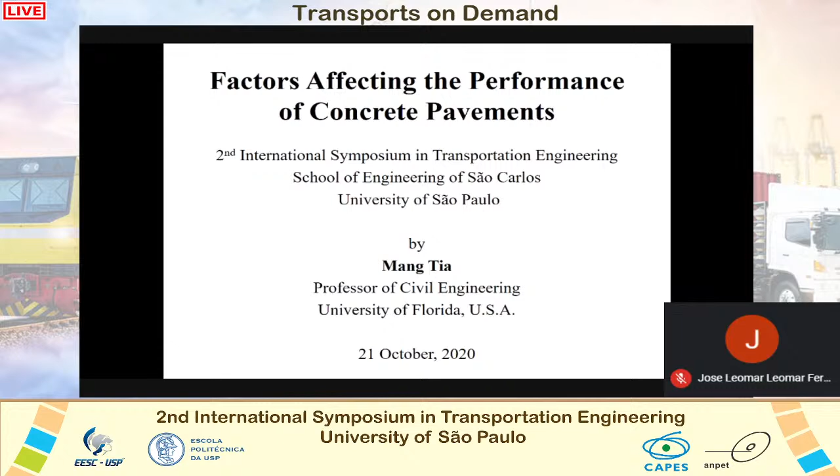Yes, thank you very much, Professor Leomar Fernandez, and thank you for inviting me to speak at this prestigious School of Engineering of São Carlos of the University of Sao Paulo. It is indeed a great honor for me to do that. I have not visited your school, but I hope that in the near future I will have a chance to visit your great School of São Carlos in person.

I am speaking from the University of Florida, USA. This map shows the location of Florida in the United States. The University of Florida is located in Gainesville, marked with a green star on this map. You can also see the location of some famous cities in Florida, including Orlando, where you go to visit Disney World, Tampa, Miami, Jacksonville, and our state capital, Tallahassee.

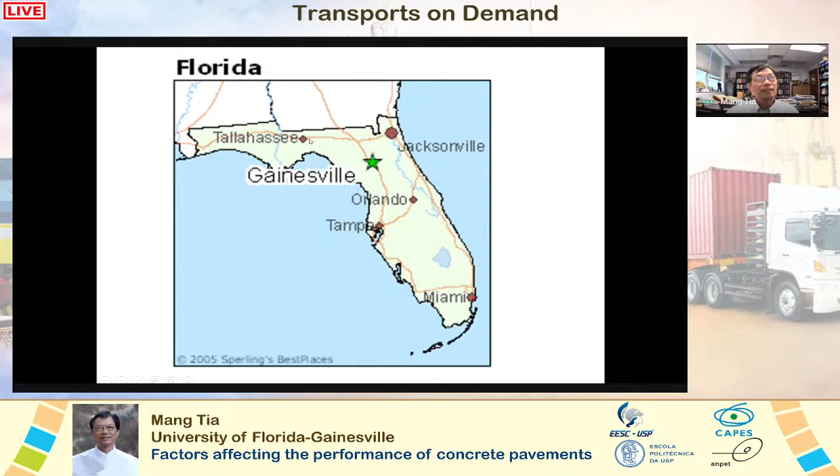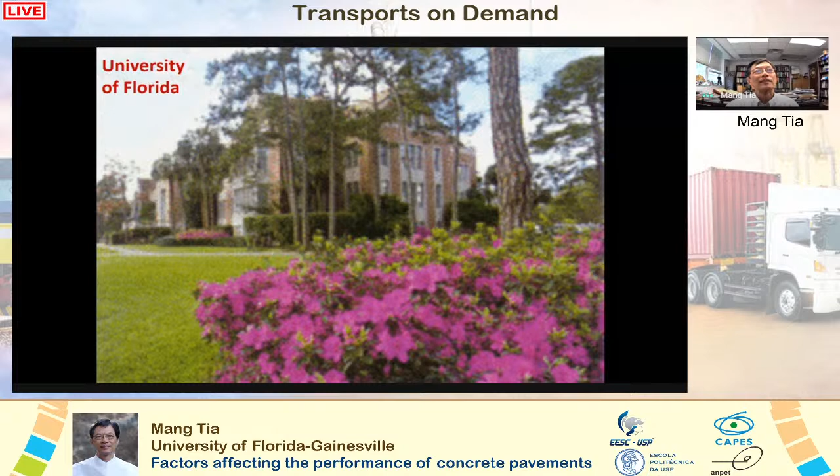However, the highest paid person at our university is not our university president - it's our football coach. People are very crazy about football here. This is the University of Florida during a football game before the pandemic. Now, due to the pandemic, the football stadium is allowed only 20% of its normal capacity, and this is how the stadium looked during a recent football game. If you look at the other side of the stadium, it looks like there's a lot of people, but it's actually filled with fake people - images of people to make it look more full.

Well, recently about 20 people from the UF football team, including the coach, tested positive for COVID-19, and the football game was canceled last weekend. It has been suspended indefinitely for now, unfortunately.

Well, I'm here to talk about concrete pavements, not football. Here's a famous concrete pavement in northern Florida, known as Interstate 10. I-10 is about 4,000 kilometers long, starting from the Pacific West Coast in California and running all the way east to the East Coast in Florida. In Florida, this I-10 section is about 600 kilometers long, running from the Alabama state border on the western end, through the state capital Tallahassee, and ending at Jacksonville on the east side. Construction of I-10 started in the early 1960s and continued through the mid-1970s. During the planning for this highway, there was lobbying from the concrete industry to build it with concrete.

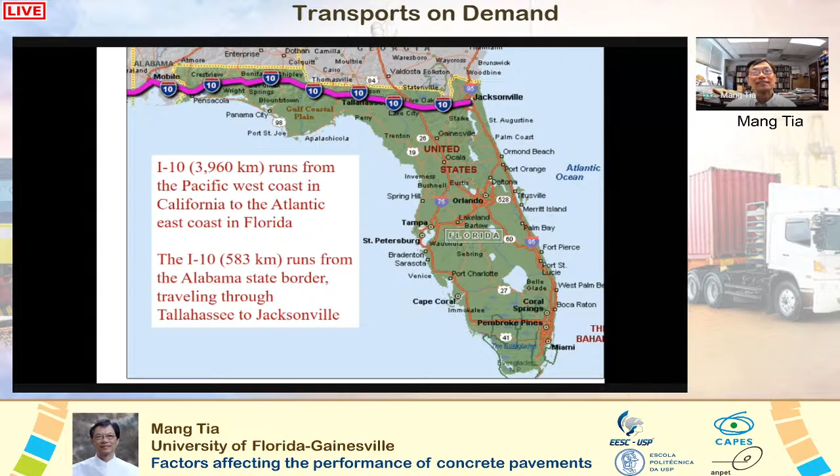There was also lobbying from the asphalt industry to build the road with asphalt. Finally, a compromise was reached: the western half, from Alabama to Tallahassee, would be built with concrete, and the eastern half, from Tallahassee to Jacksonville, would be built with asphalt.

Unfortunately, no sub-drainage system was installed to allow water to be drained off this pavement. As a result, pumping failure was observed. Pumping was due to water trapped under the concrete slab, which is pumped out of the edge of the slab when heavy vehicles go over it. Pumping causes erosion of the subbase materials underneath the slab and creates voids underneath, as you can see from this picture.

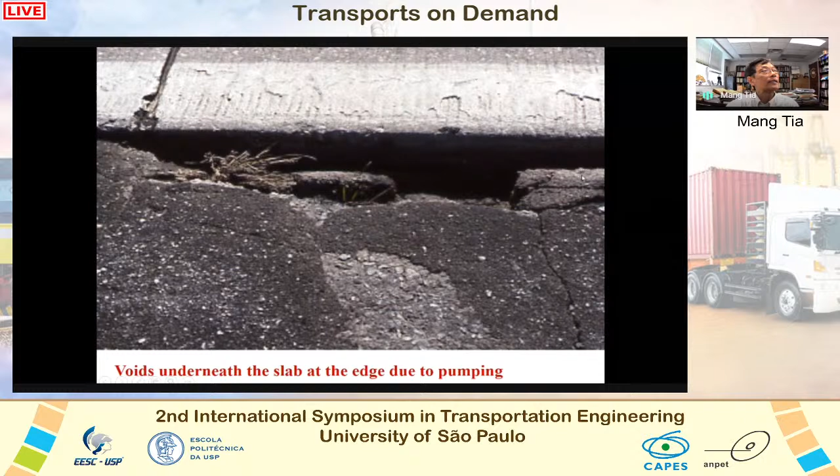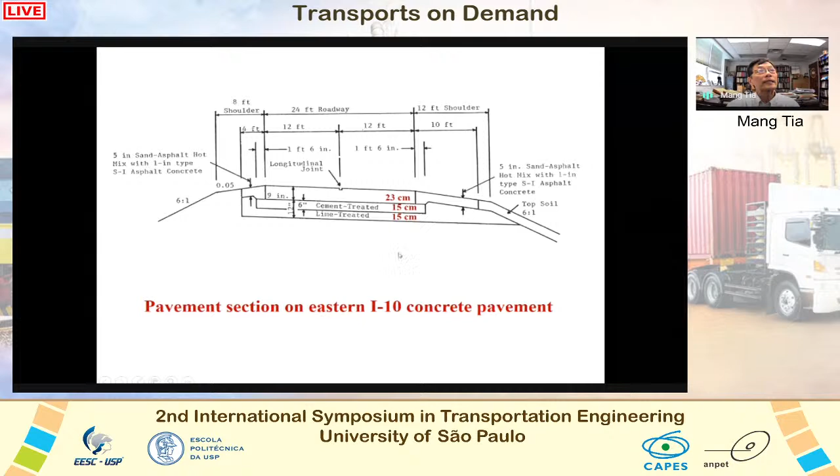Because of this observed failure, some modifications were made to the design of the rest of the pavement which had not been constructed. Instead of using 30 centimeters of stabilized subgrade, the modified design replaced it with 15 centimeters of cement treated subbase over 15 centimeters of lime treated subbase. The idea was that this would make the foundation stronger and the subbase would be less erodible.

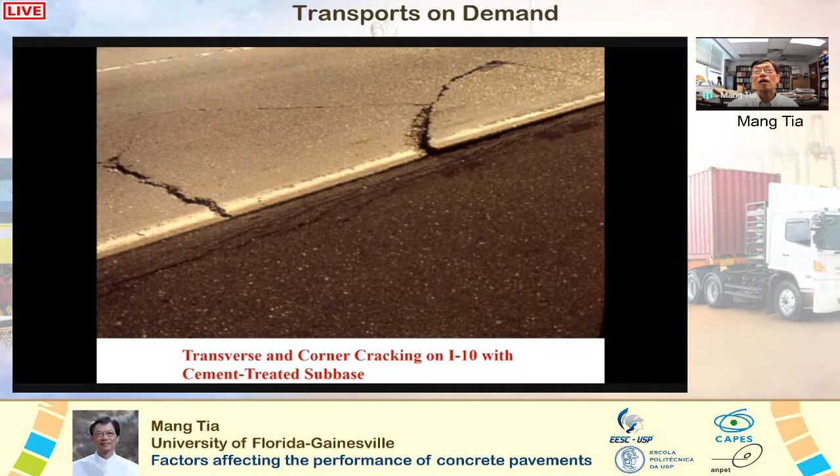However, this made the situation even worse. There was even more cracking on this pavement with a stronger subbase, as you can see from this picture. The use of the more impervious cement-treated subbase had actually worsened the drainage condition of the pavement and thus aggravated the pumping problem even more, as you can see from this picture.

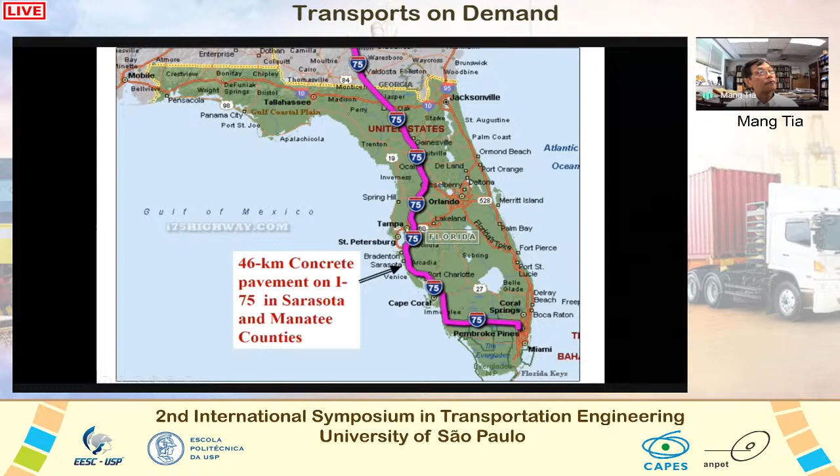Several years later, in 1980, there was construction of another concrete pavement on I-75, which runs north and south through Florida, going south all the way to Miami. There was construction of a 46-kilometer, 6-lane concrete pavement in the counties of Sarasota and Manatee, south of the city of Tampa, as shown in this map.

It also used an innovative design of skew joints. A skew joint is a joint that is not at right angle to the longitudinal direction. It also used variable joint spacing: the slabs are of different lengths, with spacings of 16, 17, 22, and 23 feet used, corresponding to 4.9, 5.2, 6.7, and 7.0 meters.

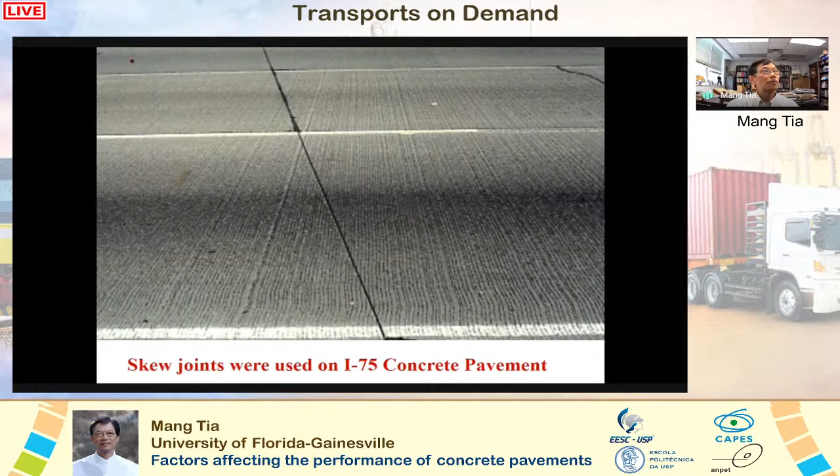The rationale behind the use of skew joints was that when trucks' wheels pass over the joints, only one wheel would pass over the joint at a time, lessening the impact effect. The rationale behind the use of variable joint spacing was that this would lessen the resonance effect. If the slabs are of different lengths, if they were to vibrate, they would vibrate at different frequencies, so the chance of all slabs vibrating at the same resonance frequency would not happen.

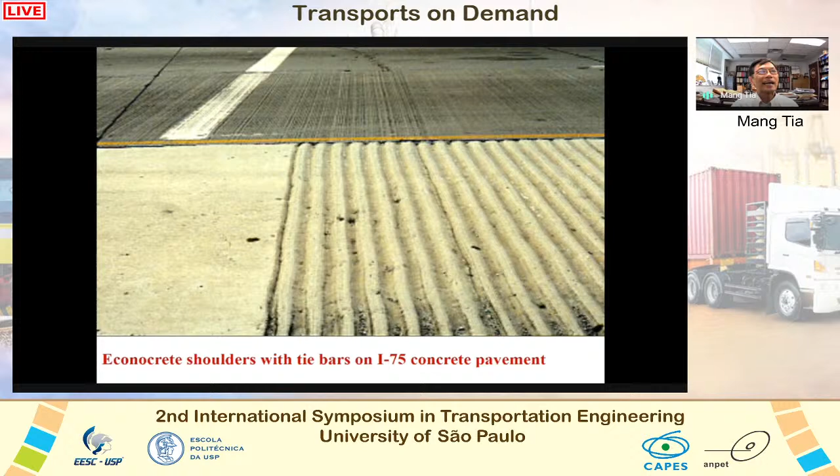The Econocrete shoulders were tied to the concrete slabs with tie bars, and it was indeed what we can call a Cadillac design. Cadillac is a very expensive car, so this is an expensive design. It was a Cadillac design which should never fail, like the Titanic ship, which should never sink. But just like the Titanic sank, this pavement failed miserably.

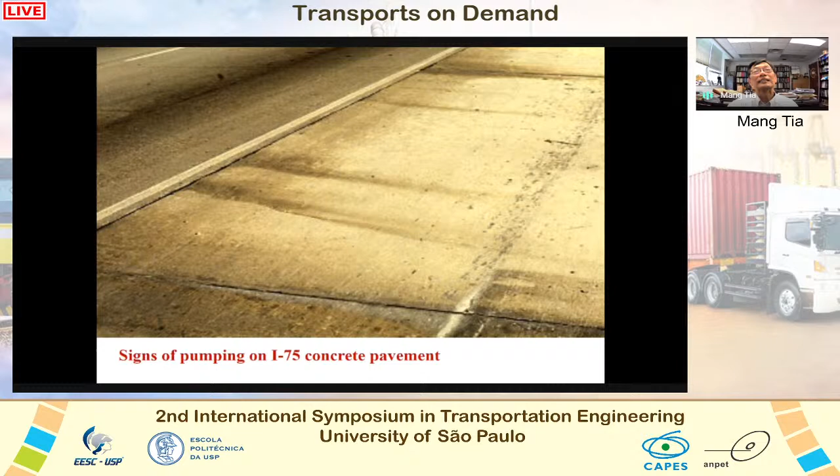Soon after the highway was opened to traffic, transverse cracking was observed, especially on the longer slabs. Later, when structural analysis was performed to evaluate the effects of the skew joint, it was found that the skew joint didn't really help. It actually increased the maximum stresses due to the acute angles of the slabs at their corners. Also, pumping was observed from the supposedly non-erodible Econocrete base.

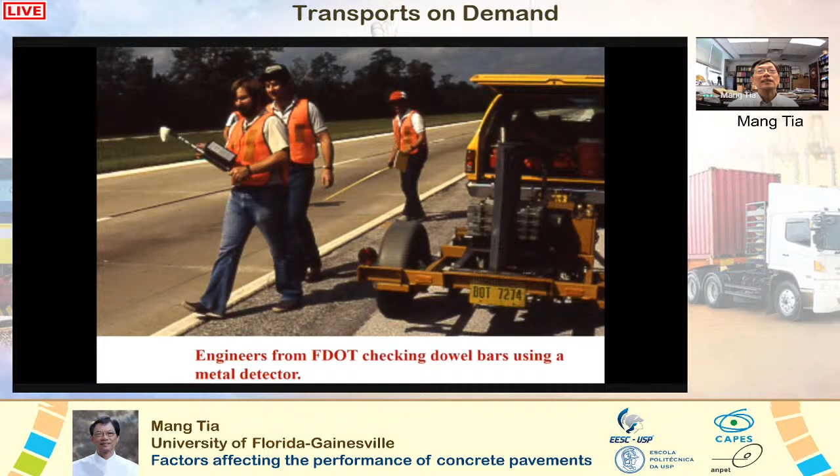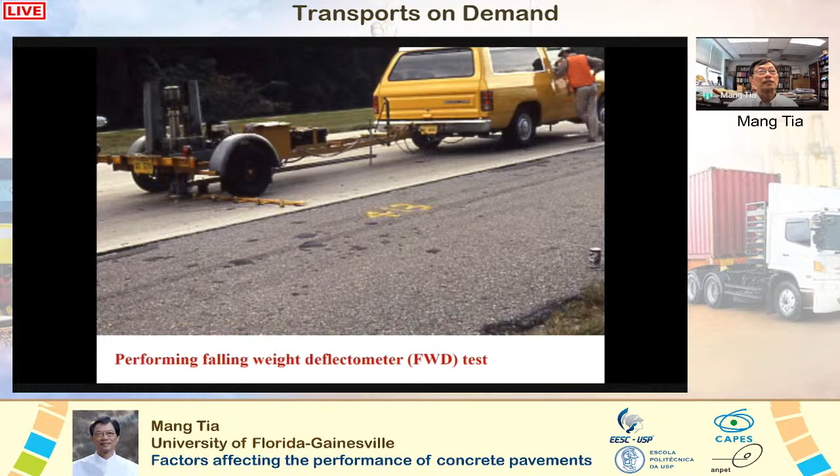We as university researchers had the opportunity to investigate the problems of these pavements, and I was the person wearing a white cap in this picture. We worked together with engineers from the Florida Department of Transportation to investigate the causes of the problems, checking for dowel bars with a metal detector, checking ground slope to evaluate drainage conditions, performing falling weight deflectometer tests to evaluate pavement response under various conditions, and using thermocouples to monitor temperature variations within the concrete slabs.

In those days, a chart recorder was used to record and plot temperatures measured by thermocouples, which were placed at various depths in the concrete slabs.

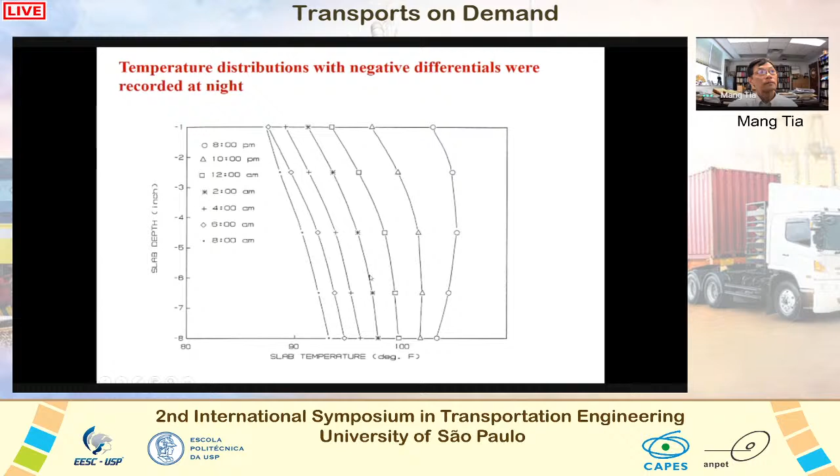At night, it's the other way around. The temperature is lower at the top than at the bottom. And this shows temperature distributions at different times at night.

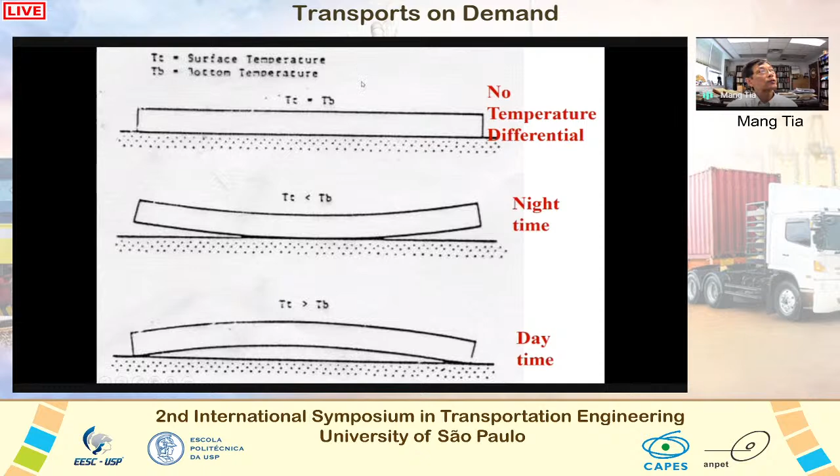So if we apply the load on a curved slab, the induced stress could be much higher than the induced stress if it were applied to a slab with no temperature differential and fully supported, as in the top figure.

To help with our evaluation, we developed a finite element model called FEACONS for analysis of concrete pavement under the combined effects of loads and temperature differentials in the concrete slab. It also had the capability to model the effects of joints and edges, and also model the behavior of concrete slabs, which is either bonded or not bonded to the base layer.

So with this finite element model, we are able to do a lot of analysis. Analysis was made to determine the most critical loading condition at night.

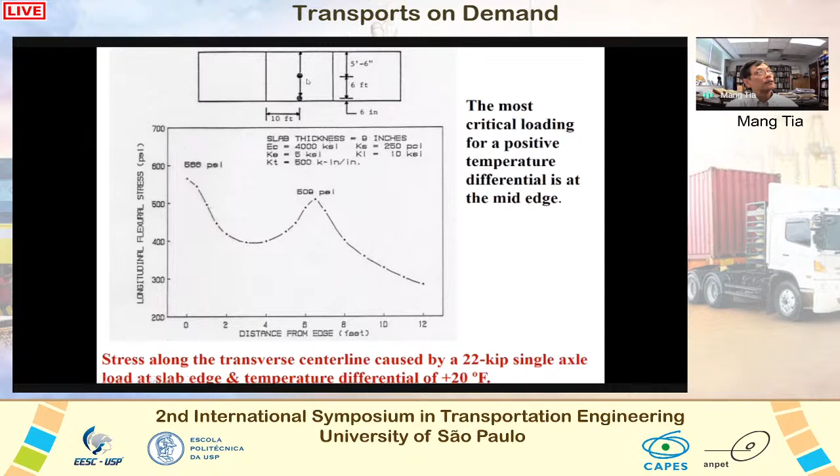So one wheel would be touching the edge, the other one is at 6 feet away from this wheel here. This is when we have the maximum stress.

In the daytime, typically, if we have a positive 20 degrees Fahrenheit, we have the worst condition. So to determine the worst maximum stress in the daytime, we'll place this load here, and we use a temperature differential of plus 20 degrees Fahrenheit to determine the maximum stress.

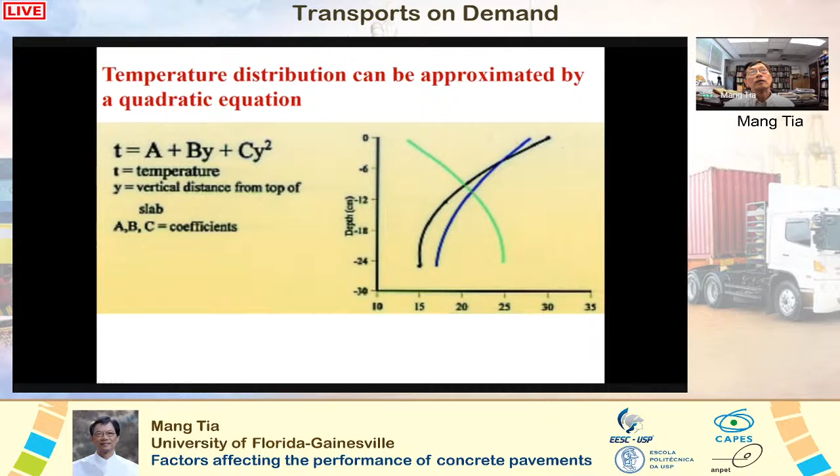How do we model the temperature differential or the temperature distribution? We can approximate it by a quadratic equation, as shown here.

But to simplify the calculation procedure, the temperature distribution was approximated by a linear distribution, as shown by a straight line here. It's much easier. We model it as a straight line instead of this quadratic equation.

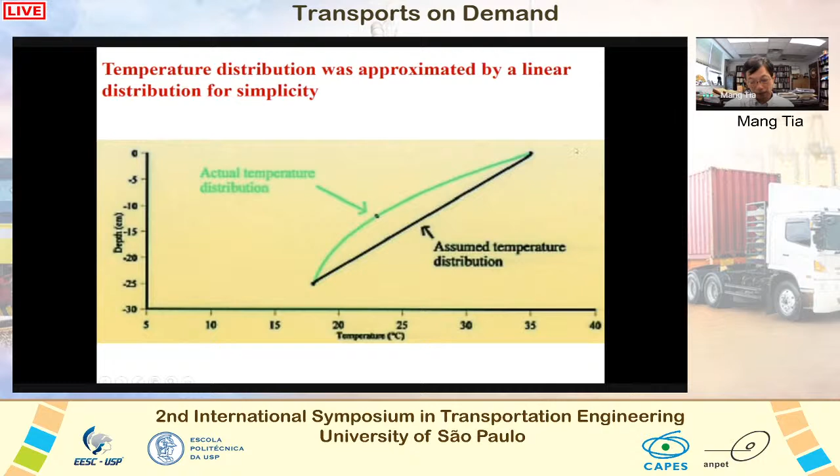When the temperature distribution is assumed to be linear, the calculated maximum stress tends to be higher for the daytime condition and lower for the nighttime condition. The maximum stress in the daytime condition is usually higher than that at night.

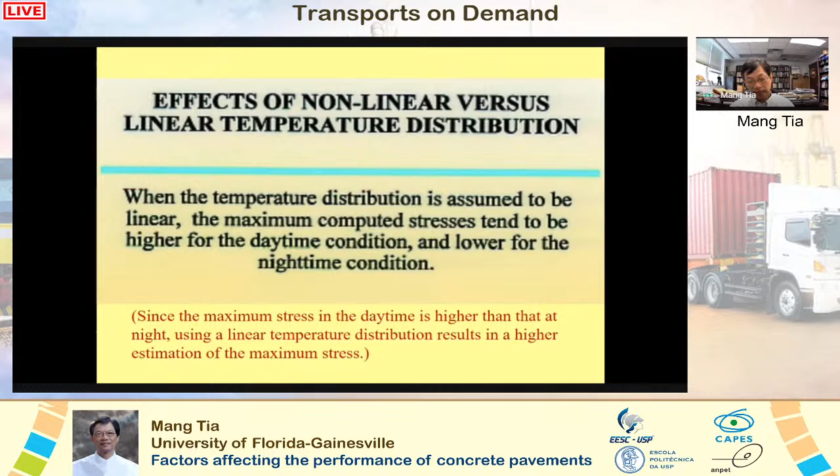Thus, if we use a linear temperature distribution, we will get a higher estimation, which is a more conservative estimation of the maximum stresses. So it's okay to use a linear approximation, because that way we'll get a more conservative estimate of the maximum stress.

As the subgrade stiffness gets higher, the stress goes lower, and this is our conventional theory about the effect of subgrade. If you use a stiffer subgrade, the stress would be lower, and that's true if there's no temperature differential. But when temperature differential is considered, the stresses are much higher, and the subgrade stiffness has less of an effect if temperature differential is considered in the analysis.

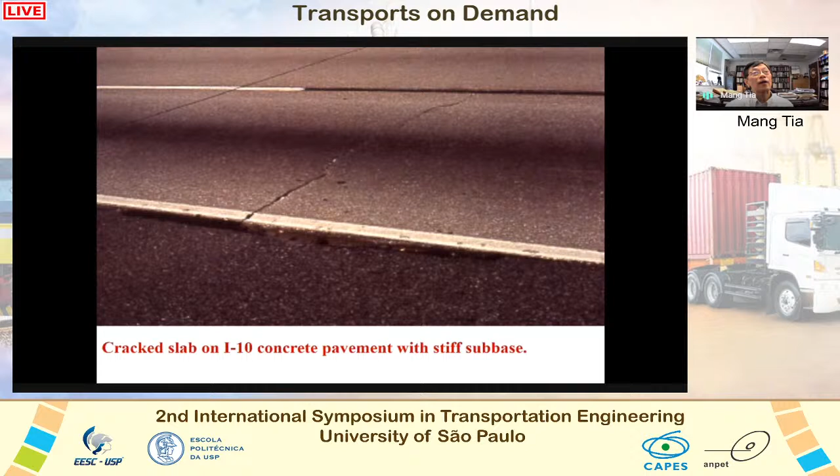Using a stiff subbase would not help in reducing cracking in the pavement slabs. Here's an example of a cracked slab on a pavement with a stiff subbase. Concrete pavement with stiff subbase could crack even more, as we have seen from our observation.

We can summarize by saying that when the effects of thermal gradients are considered, the effects of subgrade stiffness have very little effect on the maximum stresses in the concrete slab. The use of a stiff subgrade or subbase may not necessarily improve the performance of a concrete pavement.

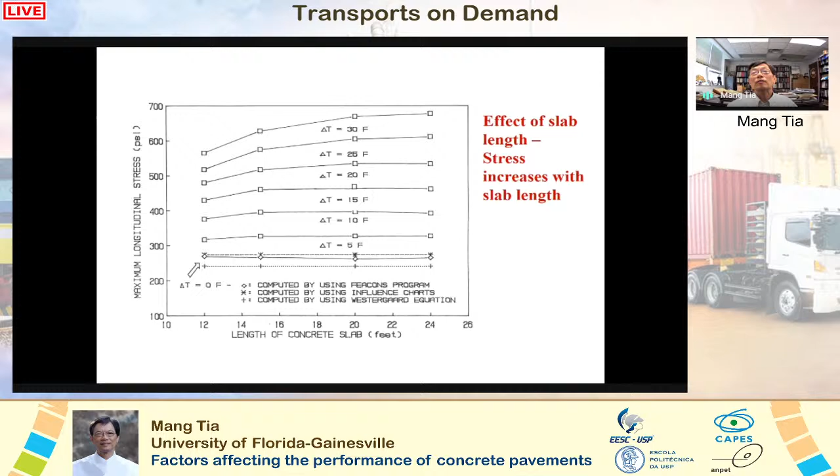When temperature differential in a concrete slab is not considered in the stress analysis, slab length has no effect on the maximum stresses. However, when there is a temperature differential in the concrete slab, the slab length could have significant effect on the maximum stresses. These are plots of maximum stress in a concrete pavement as a function of slab length for different temperature differentials. As you can see, when there is a temperature differential in the concrete slab, the maximum stress increases as the slab length increases.

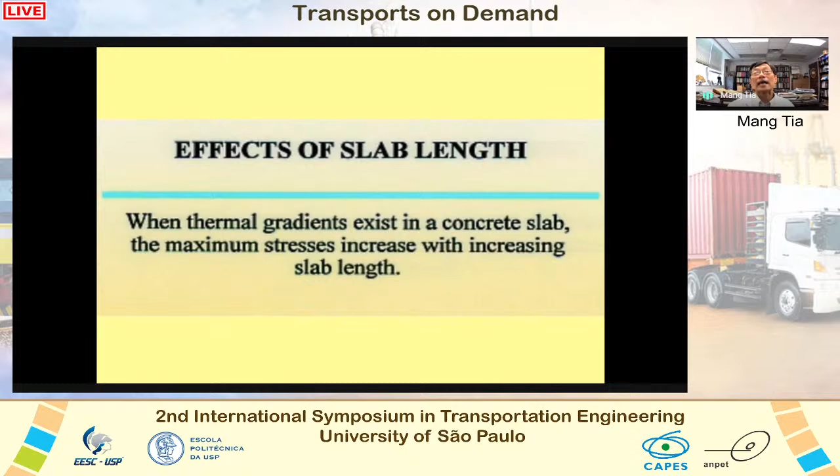Thus, we can summarize by saying that when thermal gradients exist in a concrete slab, the maximum stresses increase with increasing slab length.

This conclusion was validated by our observation of cracking in the concrete pavement on I-75 in Sarasota and Manatee counties. The slabs of longer lengths of 6.7 meter and 7.0 meter cracked more than the shorter slabs of lengths of 4.9 and 5.2 meter.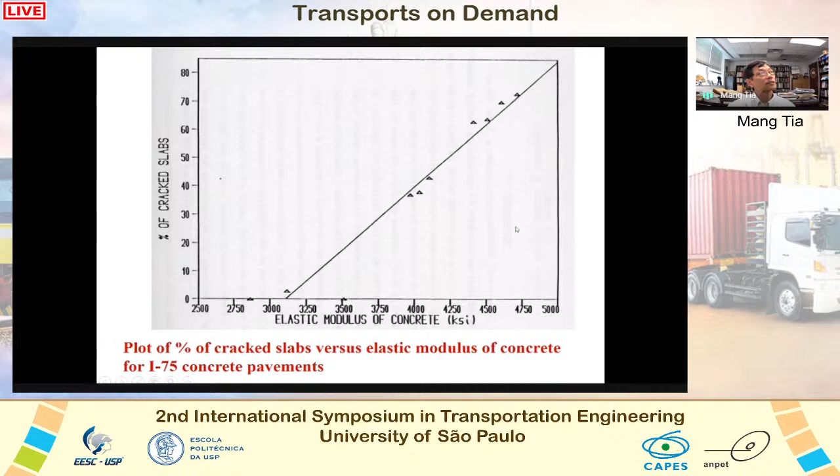We can say that maximum temperature-load induced stresses increase as the concrete modulus and coefficient of thermal expansion increase. To evaluate the potential performance of a concrete pavement, we can compare the maximum stress with the flexural strength of the concrete. A concrete giving a lower maximum stress to flexural strength ratio would be less likely to crack and would give a better performance.

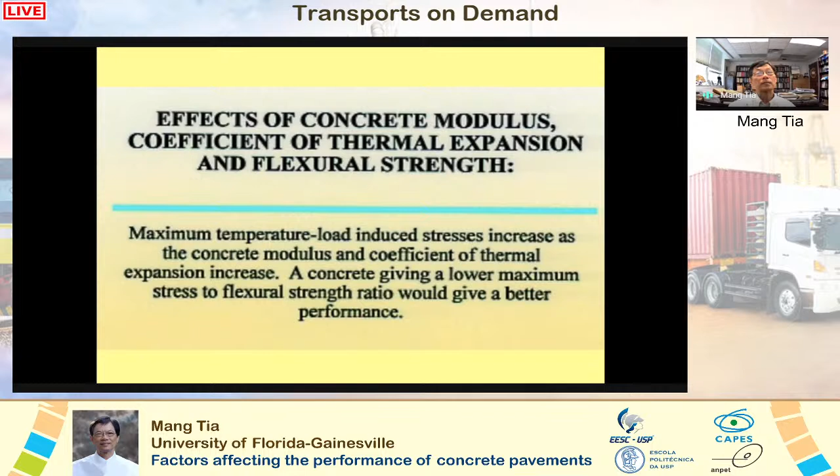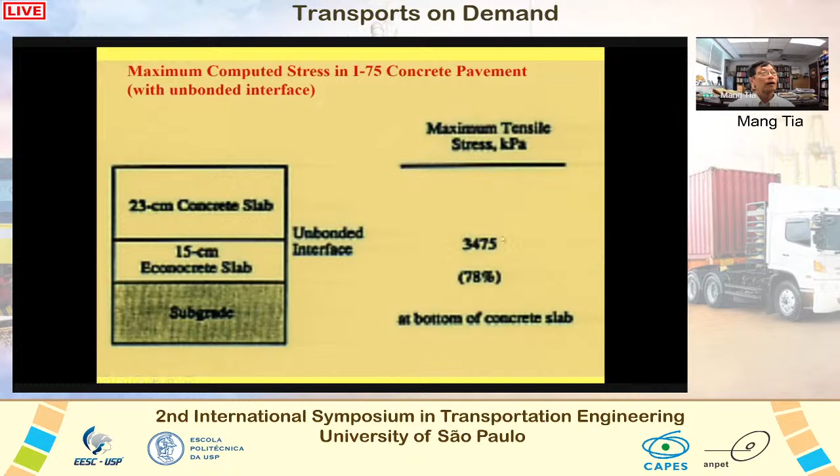The design of the I-75 concrete pavement in Sarasota and Manatee counties is shown on the left here. It had 23 centimeter of concrete over 15 centimeter of Econocrete base, and there was no bonding between the concrete and the Econocrete base. Critical stress analysis using a 22 kip axle load and a temperature differential of plus 20 degree Fahrenheit in the concrete slab gave a maximum stress at the bottom of the concrete slab, and the stress was equal to about 78% of the flexural strength of the concrete.

If the concrete slab were bonded to the Econocrete layer, the concrete and the Econocrete layer would act as one thick slab, and under the same load and temperature differential, the computed maximum stress would occur at the bottom of the Econocrete layer, and that maximum stress would be equal to only 67% of the flexural strength of the Econocrete. Unfortunately, the concrete slab was not bonded to the Econocrete base in that concrete pavement. If they had been bonded together, this pavement could have had much better performance according to our prediction.

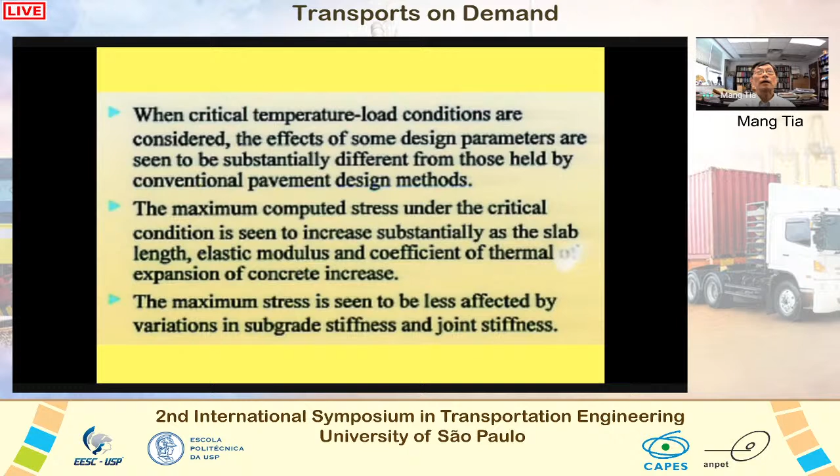We can make the following summarizing statements from our study. When critical temperature-load conditions are considered, the effects of some design parameters are seen to be substantially different from those held by conventional pavement design methods.

The maximum computed stress under the critical condition is seen to increase substantially as the slab length, elastic modulus, and coefficient of thermal expansion of concrete increase.

The maximum stress is seen to be less affected by variation in subgrade stiffness and joint stiffness. A composite pavement with a bonded interface is seen to have a much lower maximum stress than that with an unbonded interface.

Using a wider slab that extends some distance into the shoulder lane can reduce the maximum stress in the slab substantially.

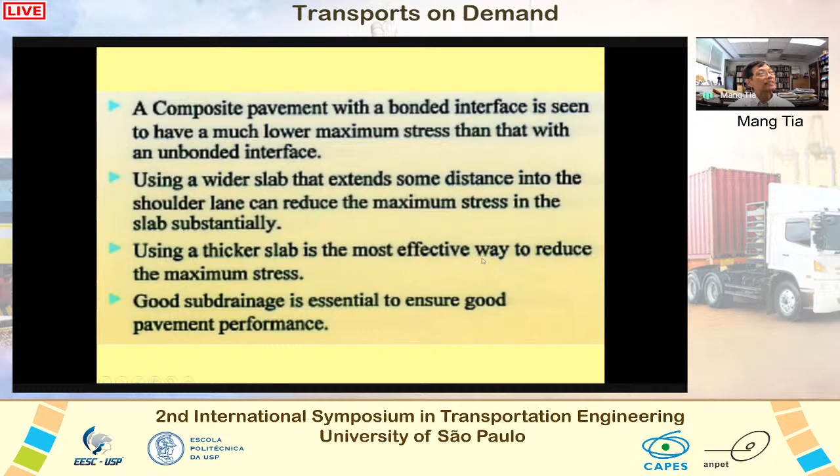Using a thicker slab is the most effective way to reduce the maximum stress. And as most people already know, good subdrainage is essential to ensure good pavement performance.

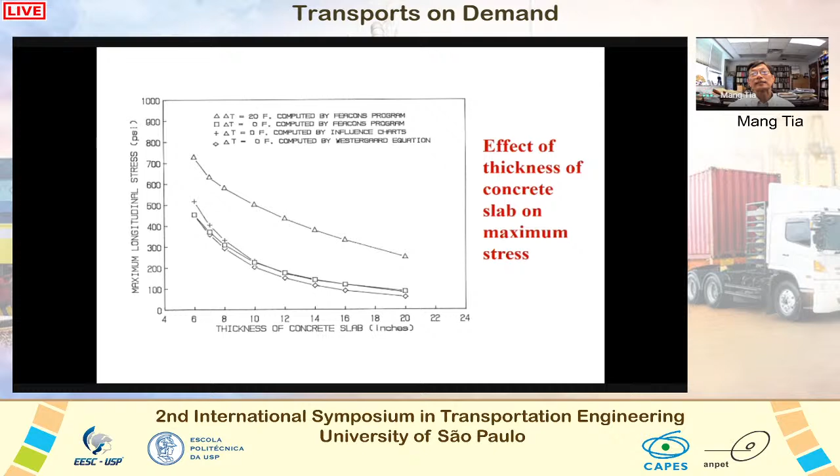These plots show the maximum stresses as a function of slab thickness. The plots on the lower part of the figure are for the condition of no temperature differential in the concrete slab. The plot on the upper part of the figure is for the condition of temperature differential of plus 20 degrees Fahrenheit. In both cases, the maximum stresses decrease significantly as the slab thickness increases.

This is a typical design used by the more recently built concrete pavements in Florida. It has a thick concrete slab with a thickness of 33 centimeters. The concrete extends 2 feet, which is equal to 61 centimeters, into the shoulder lane in order to reduce the maximum stress on the concrete slab.

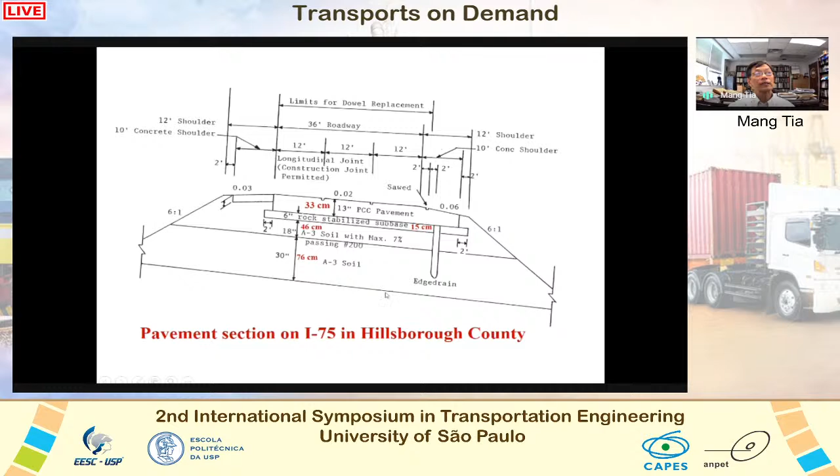The new design uses sub-base materials which have good drainage characteristics. The new design also incorporates edge drains to drain off the water which may get under the concrete slab. So from all the lessons we've learned, the design used now is much better.

Next, I want to share the result of a recent study on the evaluation of concrete pavement life expectancies in Florida. First, a little bit on the background and objective of this study.

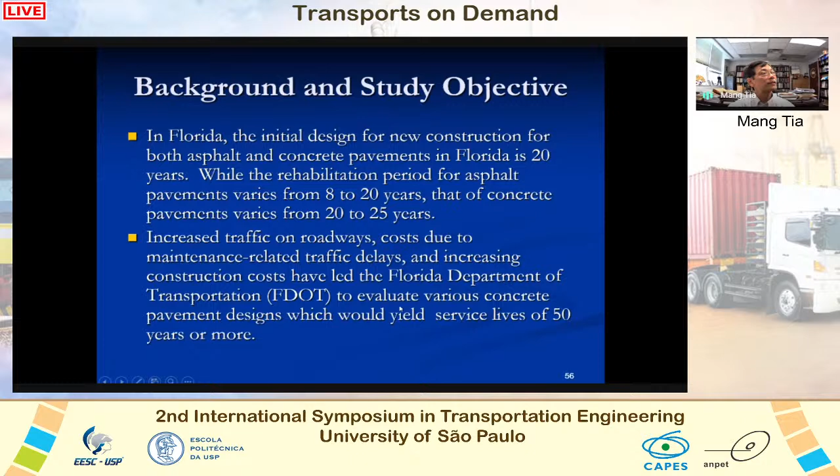In Florida, the initial design for new construction for both asphalt and concrete pavements is 20 years, while the rehabilitation period of asphalt varies from 8 to 20 years. That of concrete pavements varies from 20 to 25 years. Increased traffic on roadways, costs due to maintenance-related traffic delays and increasing construction costs have led the Florida Department of Transportation to evaluate various concrete pavement designs which would yield service lives of 50 years or more.

I would like to present 4 of the main tasks in this study. I won't read them as I will present them one by one as we go along.

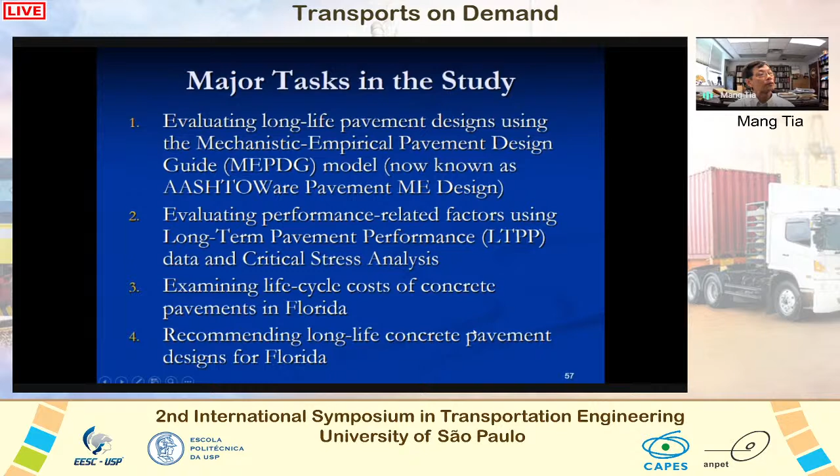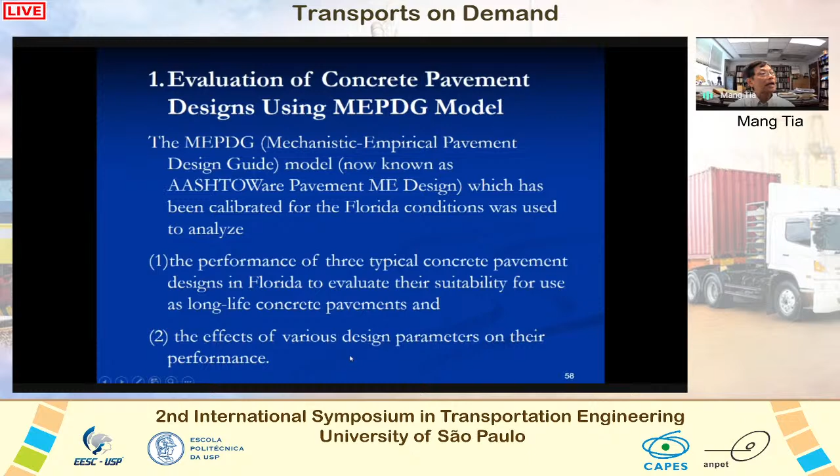In the first main task, the MEPDG, which is the Mechanistic Empirical Pavement Design Guide model, now known as the AASHTOWare Pavement ME Design, this model had been calibrated for the Florida condition, and was used to analyze, number one, the performance of 3 typical concrete pavement designs in Florida, to evaluate their suitability for use as long-life concrete pavement, and two, we also evaluated the effects of various design parameters on their performance.

Type 2 design also has a concrete slab of a certain thickness, 15 centimeters of special stabilized permeable subbase, and 137 centimeters of A3 soil, which is a permeable soil.

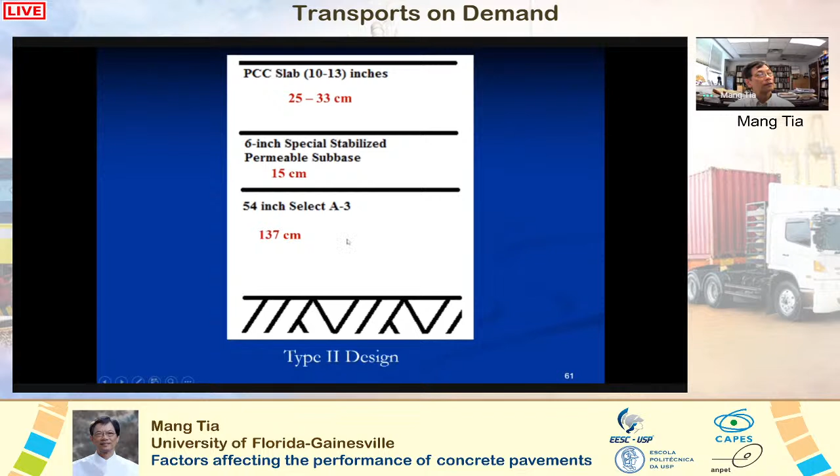These 3 concrete pavement designs were evaluated using the MEPDG model, which, as I mentioned earlier, has been calibrated for Florida condition. The design life of the concrete pavements to be analyzed by the MEPDG model was set to be 50 years.

The outputs of the MEPDG analysis give the predicted performance of the pavements in terms of International Roughness Index (IRI), joint faulting, and transverse cracking over the design period. If one or more of the predicted distresses at the end of the design period exceed the acceptable threshold values, the analyzed pavements would be considered to have failed for the design period.

The input threshold values used are given here. We need to have an initial IRI, and the initial IRI was set to be 58 inches per mile. This is the threshold value without consideration of reliability level.

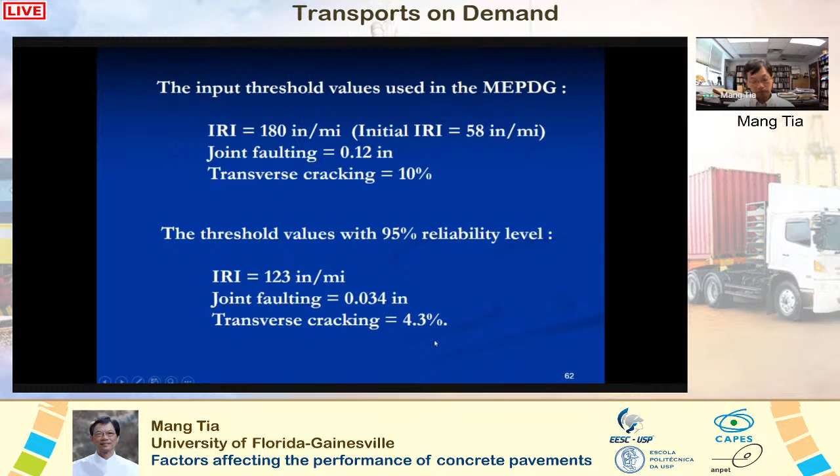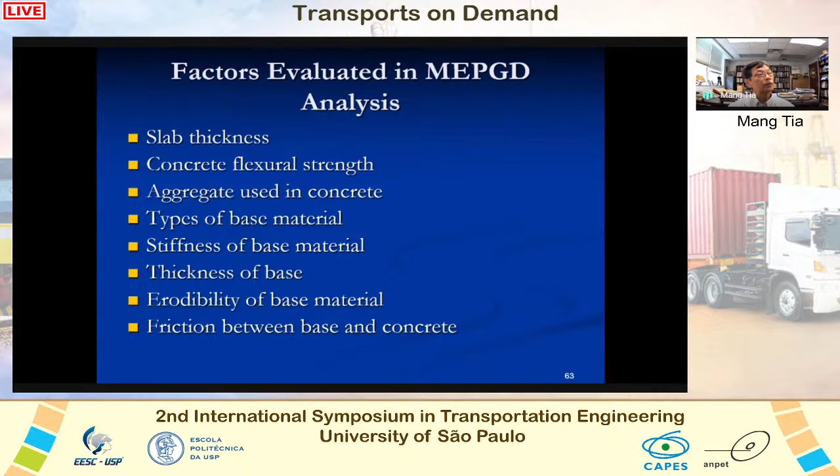The factors evaluated in our analysis include slab thickness, concrete flexural strength, aggregate used in the concrete, types of base material, stiffness of base material, thickness of base, erodibility of base material, and also friction between the base and the concrete.

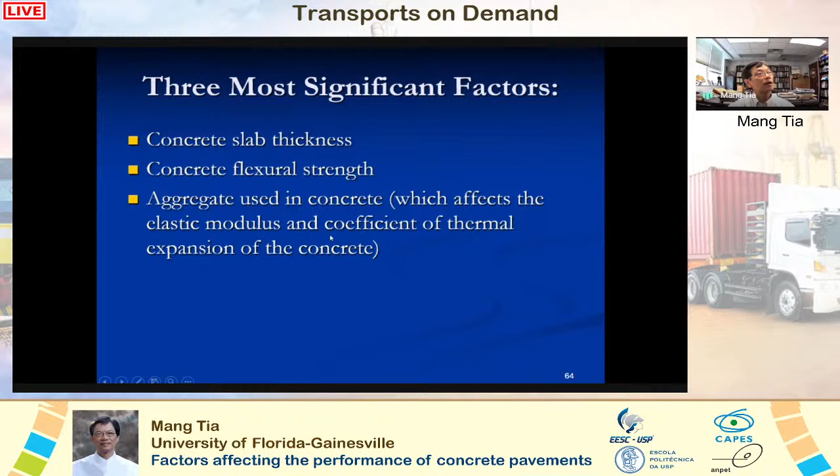What we found is that out of all these factors, the 3 most significant factors were: 1, the concrete slab thickness, concrete flexural strength, and the aggregate used in the concrete, which affects the elastic modulus and coefficient of thermal expansion of the concrete.

Three typical concretes used in Florida, made with three different aggregates, were used in this analysis. These three aggregates were: Brooksville limestone, which is a porous limestone in Florida, Calera limestone, which is a dense limestone, and river gravel.

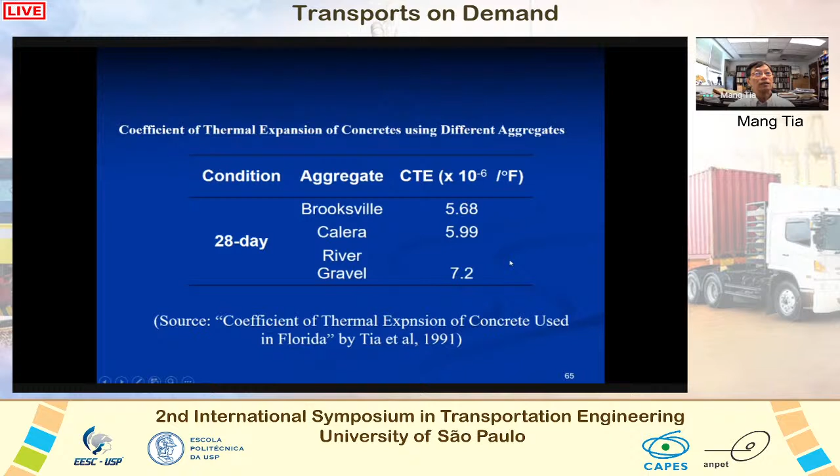A flexural strength of concrete of 650 psi, which is equal to 4.5 megapascal, was used in the analysis.

In a previous study by UF, the elastic modulus of Florida concrete was related to the flexural strength, unit weight, and type of aggregate used by various regression equations. We see here the regression equations which relate the density and the flexural strength to the elastic modulus.

The developed equations, as shown here, were used in determining the elastic modulus of these three concretes used in the analysis. This table shows the calculated elastic modulus of these three concretes with a flexural strength of 650 psi. So basically, when the flexural strength changes, the elastic modulus would change accordingly, and we use these equations to estimate the elastic modulus at different levels of flexural strength.

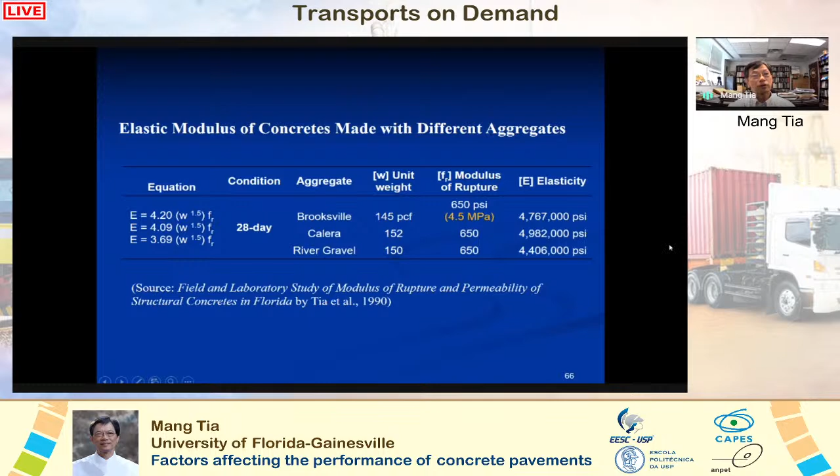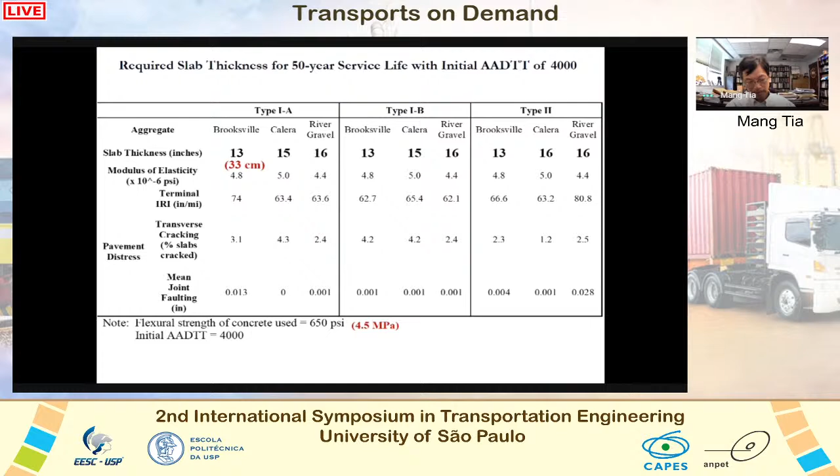So let me repeat this: if you use the same concrete made with the same aggregate, if you increase the flexural strength, the performance would be better.

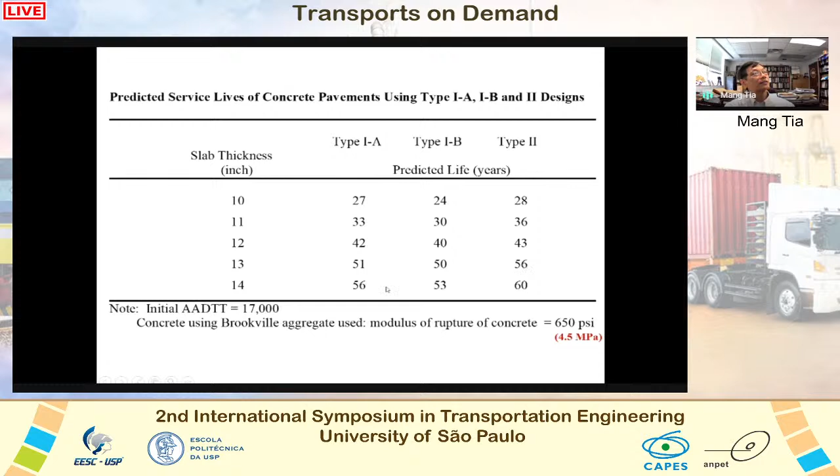If we have different thicknesses, here's a different thicknesses, this shows the expected life. You can see that, using this good concrete made with this good aggregate, it can be done if the thickness is 13 inches. At 13 inches, the life expectancy is over 50 years for all three designs, and type 2 is relatively better than the other two.

But all of them would work. So the key thing is you need to have enough thickness, and you need to have the right concrete, not just strength. In the past we always think about strength, make it stronger, but you need to have the right aggregate, otherwise it won't work. We have the right aggregate, and of course you need adequate strength.

In this analysis, we use a flexural strength of 650 psi, which is equal to 4.5 megapascal. Then it would last for at least 50 years.

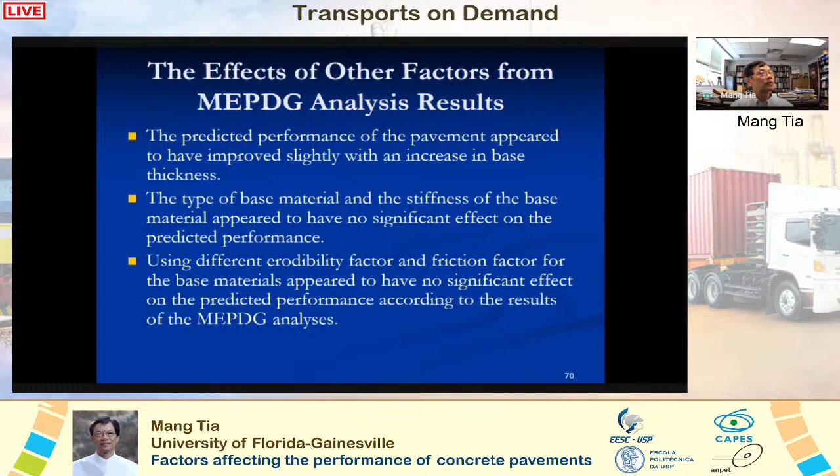So we can make these conclusions: the predicted performance of the pavement appears to have improved slightly with an increase in base thickness. The type of base material and stiffness of the base material appear to have no significant effect on the predicted performance. Also, using different erodibility factor and friction factor for the base material appear to have no significant effect on the predicted performance, according to the results of our MEPDG analysis.

They've been monitoring various pavement sections, and so we got the data from this database, the long-term pavement performance database, which was used to evaluate the effects of various factors on performance of jointed plain concrete pavements in the U.S., with emphasis on Florida and its neighboring states.

We also did critical stress analysis using the FEACONS program on the selected jointed plain concrete pavement, JPCP, sections. We used this critical stress analysis to determine the maximum stress in the concrete slabs under critical load and temperature conditions. The maximum computed critical stress for each condition was divided by the modulus of rupture of the concrete to determine the stress to strength ratio.

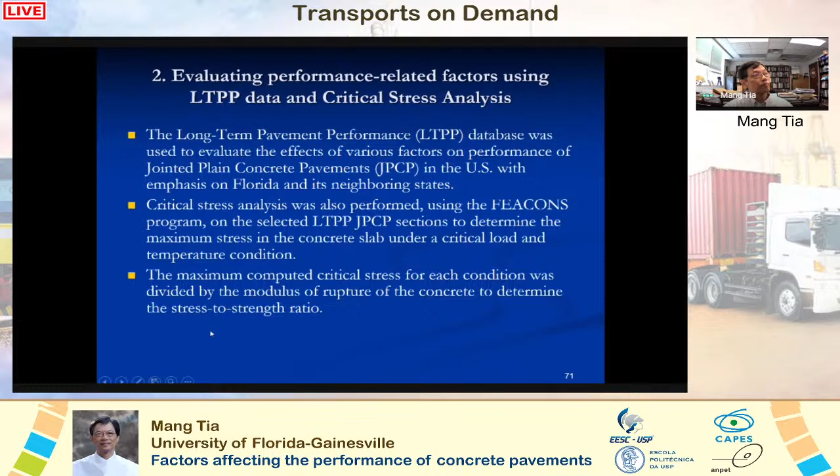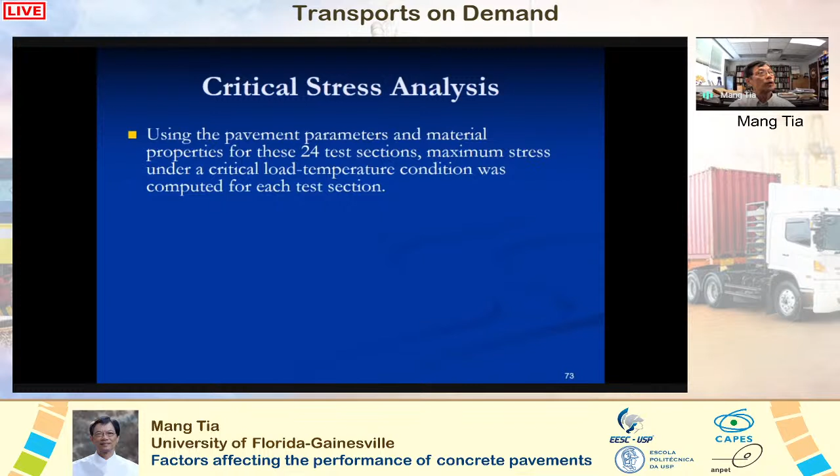In the critical stress analysis, using the pavement parameters and material properties for these 24 test sections, maximum stress under critical load-temperature condition was computed for each test section. The maximum stress caused by a 22 kip axle load applied at the middle of the edge of the concrete slab, when there was a temperature differential of 20 degrees F between the top and bottom of the concrete slab, was computed. This represented a critical loading condition as reported by previous studies for Florida DOT.

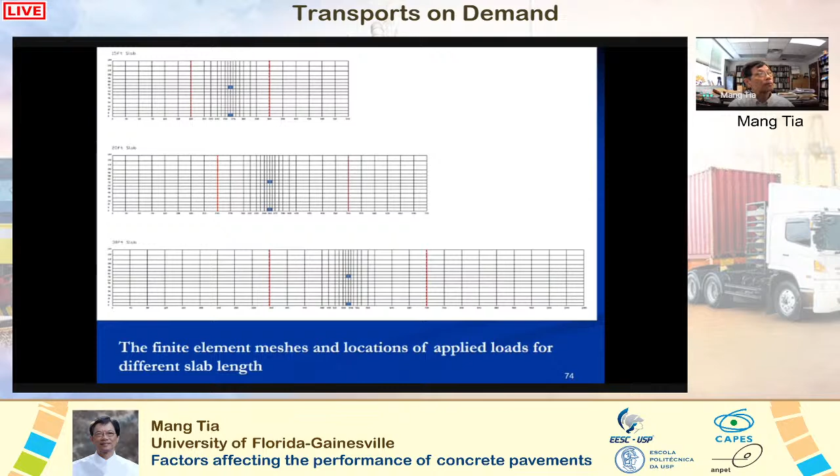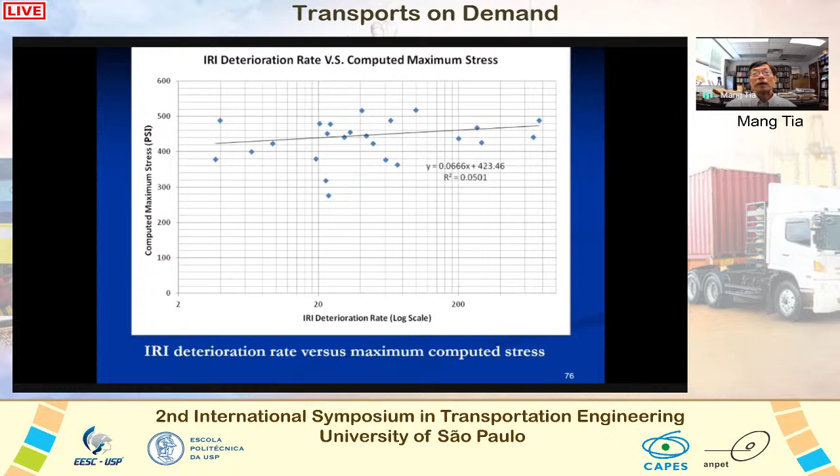The performance of the test sections was quantified by an IRI deterioration rate. The IRI deterioration rate was computed by dividing the change in IRI by the number of years and the average annual traffic in number of ESALs. So a higher IRI deterioration rate represents worse performance.

This is a plot of the computed maximum stress versus IRI deterioration rate. A higher computed maximum stress is related to a higher IRI deterioration rate. However, the correlation is not very good, as seen from this low R-squared value.

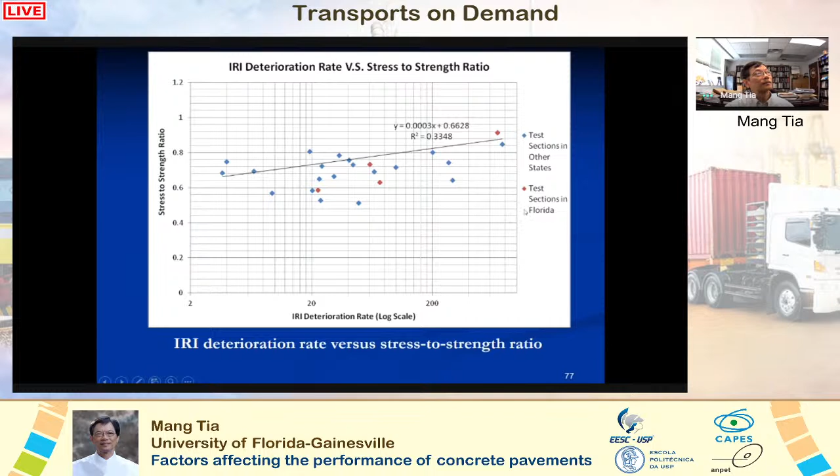Findings from the critical stress analysis are summarized as follows. The computed critical stress to strength ratio was found to be the most significant parameter related to the performance of the LTPP pavements. A lower stress to strength ratio is related to better observed pavement performance. The better performing pavements were noted to have a computed stress to strength ratio of less than 0.7.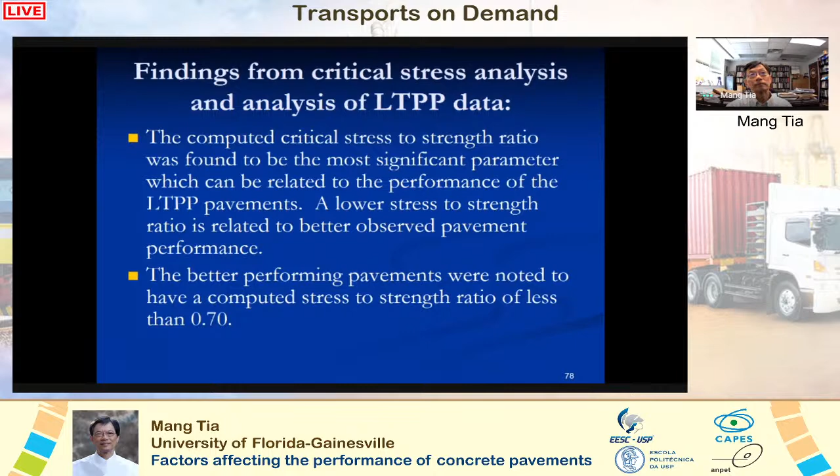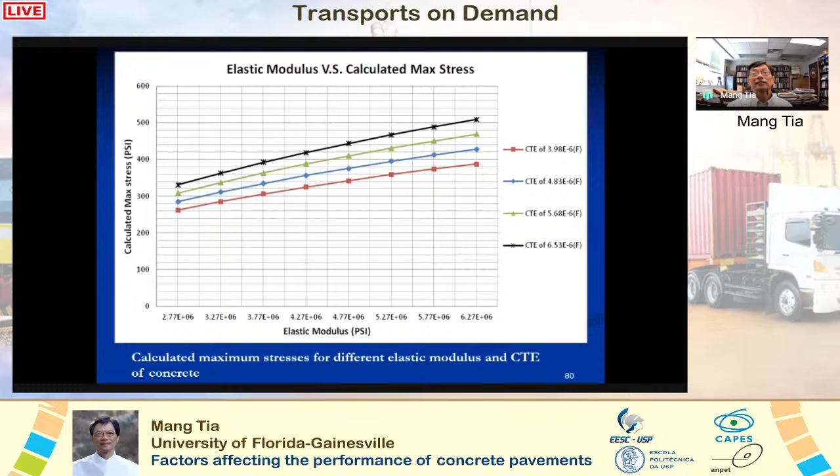These are plots of calculated maximum stress as functions of elastic modulus and coefficient of thermal expansion (CTE) from a critical stress analysis. It can be seen that the maximum stress increases as the elastic modulus increases, and also as the CTE increases.

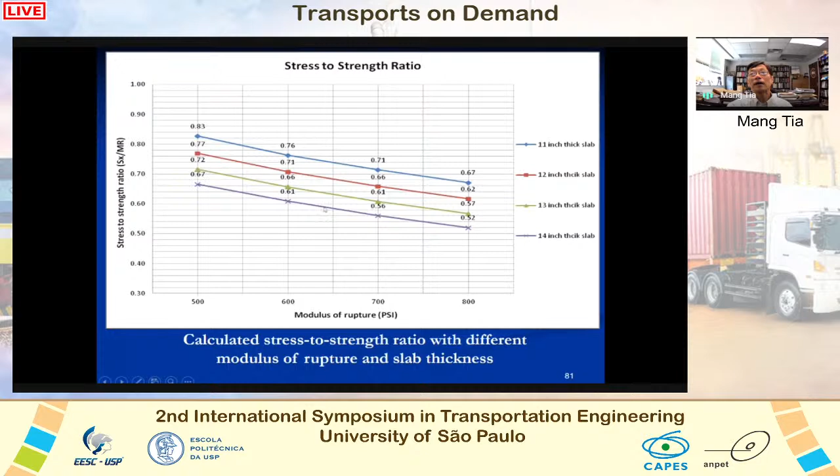These are plots of stress to strength ratio as a function of modulus of rupture and slab thickness. Concrete made with the best aggregate among the three—okay, not necessarily the absolute best, but among the three—the Brooksville aggregate was used in the analysis, and the relationship between the elastic modulus and modulus of rupture of the concrete was used to determine the elastic modulus needed in the analysis.

So when you assume a certain flexural strength, you have to estimate the elastic modulus of that concrete, and we use the equation developed earlier to make those estimations. From the plot, it can be seen that for concrete made with the same aggregate, increasing the modulus of rupture of the concrete will reduce the stress to strength ratio and thus improve the performance of the concrete pavement. Didn't we already conclude that? Well, we concluded that from the MEPDG analysis. Now we conclude it from the critical stress analysis.

Here's a summary of the findings from the critical stress analysis. The most significant factors affecting stress to strength ratio are the concrete slab thickness and the concrete properties, which include the elastic modulus, modulus of rupture, and coefficient of thermal expansion. Variations in the base and sub-base properties were found to have minimal effects on the stress to strength ratio for concrete slab thickness of 11 inches or higher.

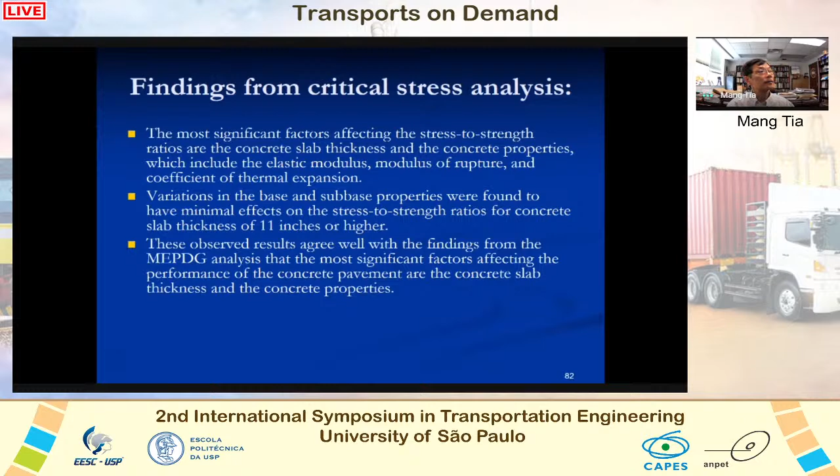These observed results agree well with the findings from the MEPDG analysis. The findings show that the most significant factors affecting performance of the concrete pavements are the concrete slab thickness and the concrete properties. Similar to the results of the MEPDG analysis, when the same aggregate is used in the concrete, increasing the flexural strength of the concrete will result in better predicted pavement performance.

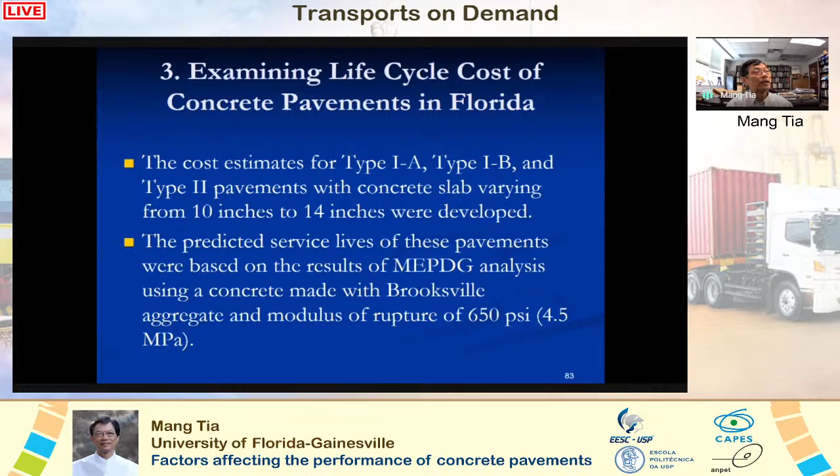So the third task is life cycle cost analysis. Cost estimates for these three pavement designs with concrete slabs varying from 10 inches to 14 inches were developed. The predicted service lives of these pavements were based on results of the MEPDG analysis using concrete made with Brooksville aggregate and assuming a modulus of rupture of 650 psi.

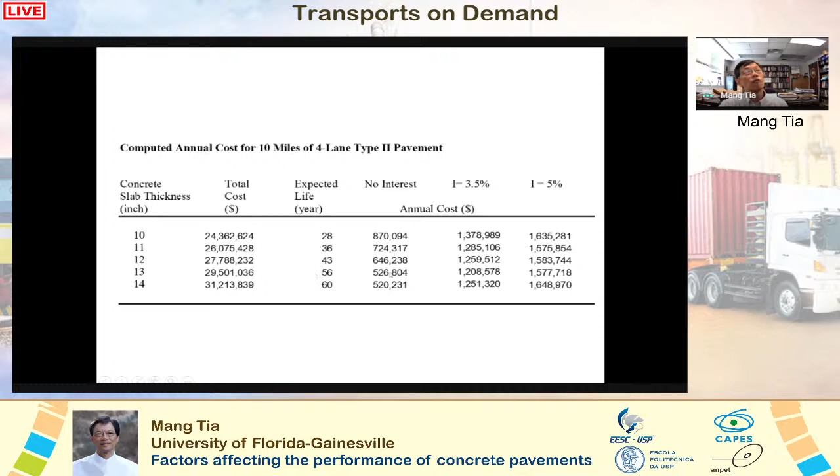We can summarize the findings here. Type 2 design has the lowest cost estimate, and when cost of interest was not considered, we can use much thicker slabs. But if we have an interest rate of 3.5%, then we can go with 13 inches, which is equal to 33 centimeters, and the expected life would be 51, 50, or 56, depending on the design. So design 2 is the best.

So here's our recommendation to Florida DOT. The 3 typical Florida concrete pavement designs evaluated in this study can be used as long life pavements if the slab thickness is adequate and the concrete has low elastic modulus, low coefficient of thermal expansion, and adequate flexural strength. So the key thing is not just flexural strength, but we need to have low elastic modulus and low coefficient of thermal expansion. If you just put in any type of concrete with enough strength, it may not work.

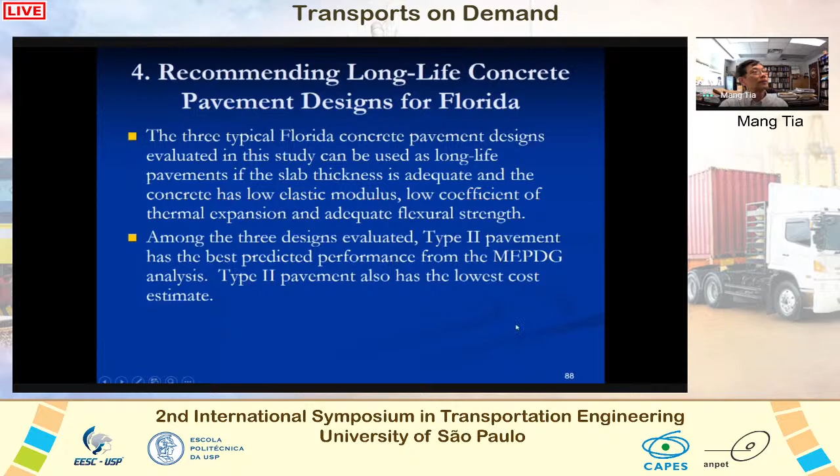Among the 3 designs, type 2 is the best, in terms of longest expected life and the lowest cost. So we recommend that, if possible, use type 2 design for long life concrete pavements in Florida. But this requires use of A3 soil, which is a good soil, permeable, with good strength. But if it's not available, we can go with type 1A or type 1B as well.

So the key thing is we need to have enough thickness. If we want it to last for 50 years with heavy traffic, you need at least 13 inches. Better yet, if we have 14 inches. This would be equivalent to 33 centimeters, and 14 inches equal to 35.6 centimeters. If we use 14 inches, we have an extra half an inch or 1 inch, which can be considered as sacrificial concrete for future grinding during the life of the pavement to restore its ride quality, texture, and remediate faulting.

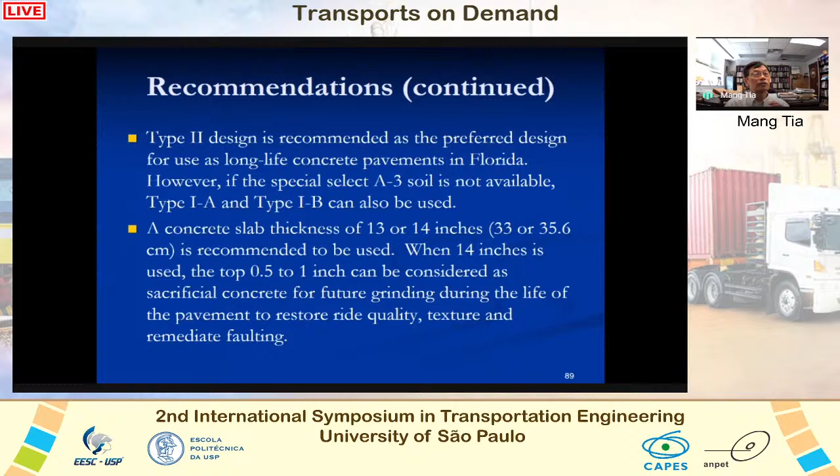After many years, concrete pavement tends to have some faulting, and we can grind it to restore its ride-ability. With the extra half an inch or 1 inch, every time we can grind off a quarter inch, and we do it about 2 to 4 times.

The present construction specification seems to be adequate. We just need to design the concrete mixtures accordingly. 650 psi or 4.5 megapascals at 28 days seems to be a good strength to use. The key thing here is to use an aggregate which will give us a low elastic modulus and low coefficient of thermal expansion. How do we know?

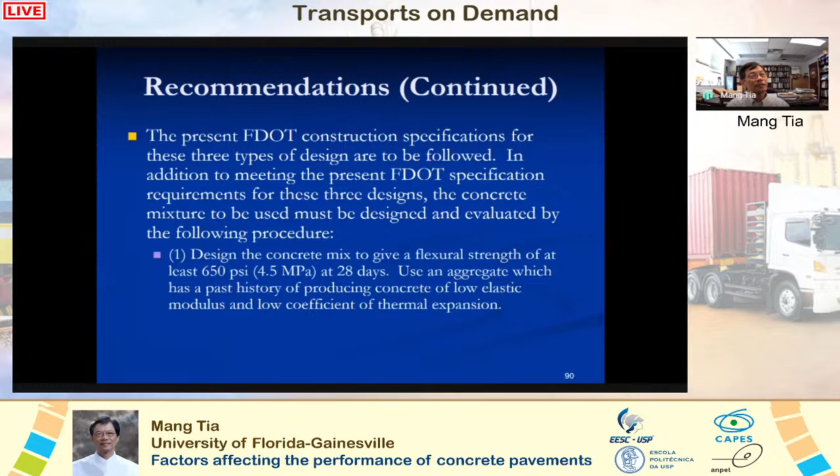Well, we can look at past records of test data. If not, we have to run some tests in the lab. So what are the key things we need to look at? We need to look at flexural strength, elastic modulus, and CTE, the coefficient of thermal expansion. And usually we measure that at 28 days.

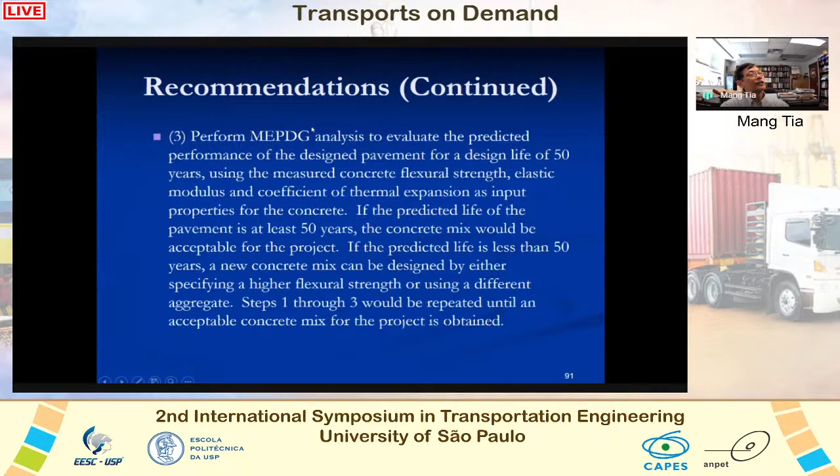And how do we know that it's going to last for 50 years? We can run this MEPDG analysis. Now it's not called MEPDG because in the past this software was free. Now it's no longer free. So it's called the AASHTOWare ME Design. It's not free anymore, so if you want to get it, you have to pay a license fee.

So we can run the analysis if you have all the material data and the traffic. We can use this ME pavement design software to determine how long it's going to last, determine the expected life, and whether it has an expected life of at least 50 years, using the properties of the concrete.

If the predicted life of the pavement is at least 50 years, the concrete mix would be acceptable for the project. If the predicted life is less than 50 years, a new concrete mix can be designed by either specifying a higher flexural strength or using a different aggregate, and if possible, try to use an aggregate that would give us a lower coefficient of thermal expansion. These steps would be repeated until an acceptable concrete mix for the project is obtained.

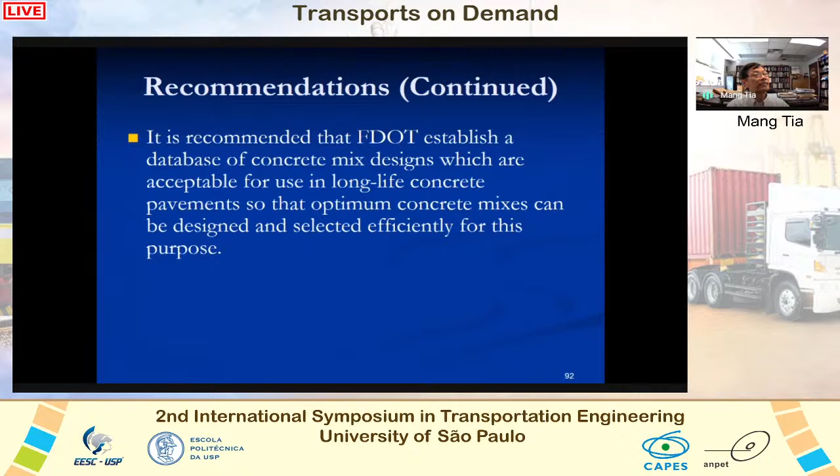We also recommended that FDOT establish a database of concrete mix designs which are acceptable, so you don't have to design the mix every time. We have a good database for use in long life concrete pavement, so the optimum concrete mixes can be designed and selected efficiently for this purpose.

So what is the message I am preaching? The message is that concrete pavement would perform better if you use the right kind of aggregate, one that gives a low coefficient of thermal expansion and also a relatively low elastic modulus. The second thing I'm preaching is don't just try to increase the subgrade stiffness.

The subgrade stiffness is not going to help too much. You need some stiffness, but if you have problems, don't try to increase the subgrade stiffness. So the message is very simple, but we need to apply it. If you believe it and then apply it, you'll see that it's going to work. Thank you very much, I can take questions now.

Thank you very much for your very broad presentation, addressing many factors that affect concrete pavement performance. I'm sure the audience, starting with me, enjoyed and learned a lot. Thank you, and as you mentioned, it would be very nice to have you here in person. In March, our graduate program decided to have a partnership, and the partners would come to stay with us, lecturing and supervising. You are my partner, so this arrangement of doing things online seems to work fairly well.

So it would be good to have you here, saving a lot of time not having to fly over, along with the financial support to have you here. When the pandemic is over, we'll meet in person. As soon as possible after the pandemic, we will restart thinking about our partners, and I hope to have you here as soon as possible.